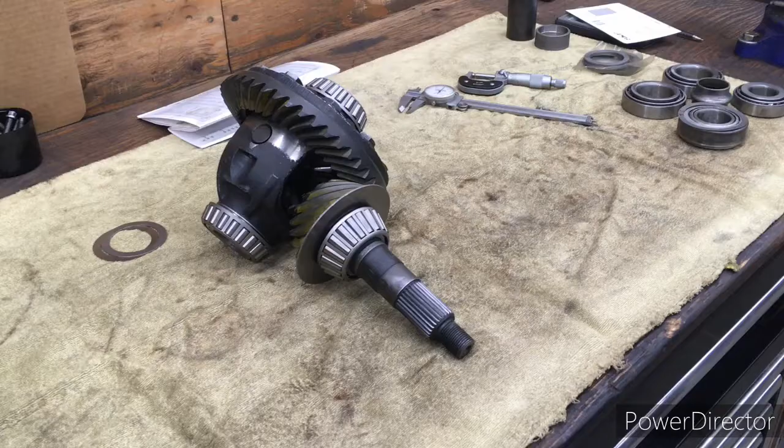Front Dana 30 on the Jeep Grand Cherokee. And I guess the first thing is you want to disassemble the old assembly. Try and save your bearings if you can, but remove your bearings and keep track of your shims. There should be some shims in behind each bearing on the carrier. So remove the bearings, keep track of the shims,

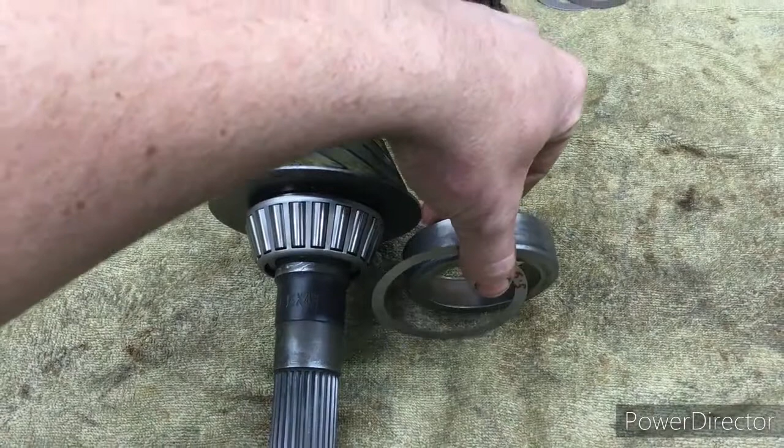remove the bearings on the pinion and keep track of the shims there. You might have to remove the race inside the housing there. There may be some shims beside the cup that's installed in the housing. Keep track of all of that, and then once you've removed your bearings and kept track of your shims,

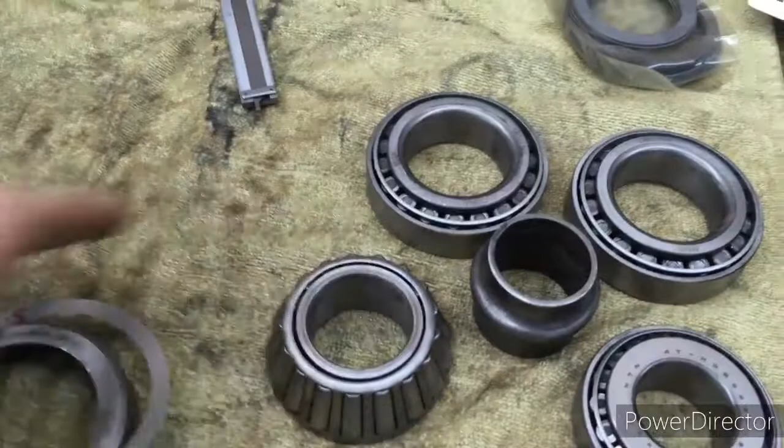get your old bearings, if you were able to save them. I wasn't able to save the carrier bearings, so I had to buy a new set and grind out the inside bore on all of the bearings so that you can slip them on and off by hand. Use a stone, not a carbide tip, just like sharpening a chisel. You grind down the hardened steel with a stone.

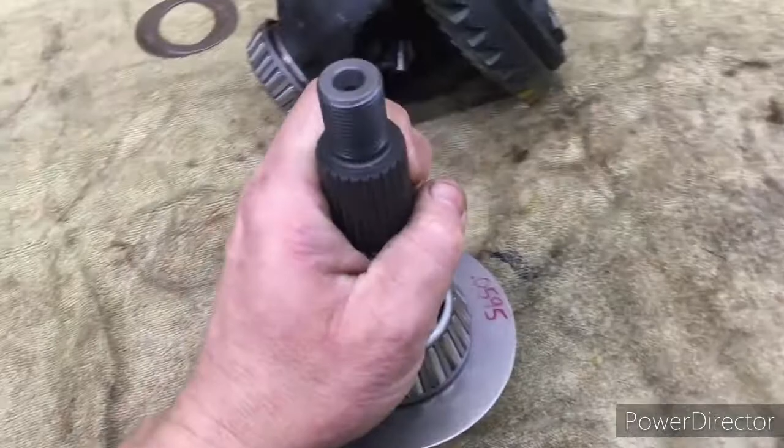Once you've got your bearings, they're all slip fit and ready. Then what I also did, because I'm changing the ring and the pinion, this is a brand new set. My new pinion, the yoke was tight, so that wouldn't go on there. Had to be press fit on.

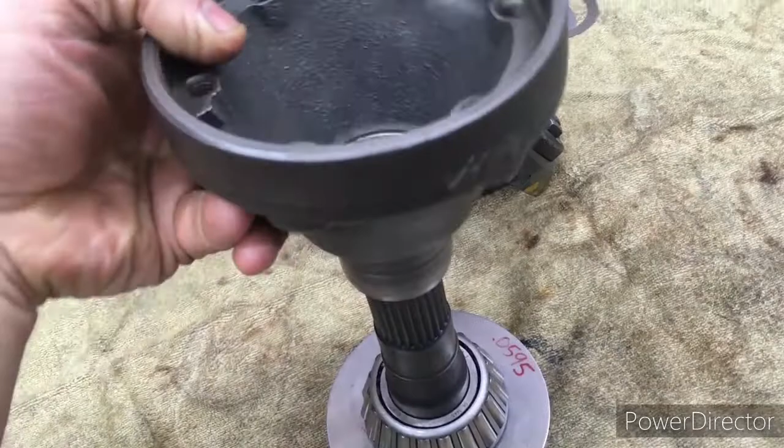So what I did was I put some lapping compound on here, and I worked it up and down in the press. I'd press it on, press it off, and I just kept doing that until I got it to the point where I can install it and remove it by hand. That's my preference. You don't have to do that if you don't want to. I like all my parts to go on and off by hand, just for ease of installation and disassembly.

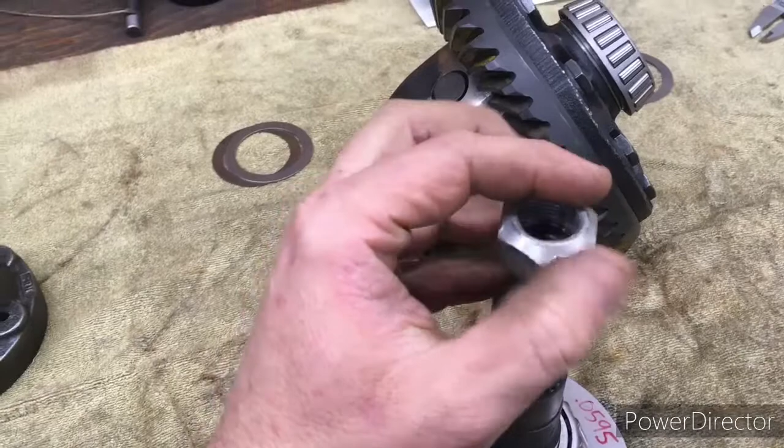Also, the old nut, if you have a die or a tap, you can tap the threads in here and make sure that it'll go on and off by hand as well. I don't have the tap for that size, so again I used lapping compound, and I spun this up and down with the impact, so that'll come on and off by hand. All of this is in preparation for the assembly and disassembly of the pinion when you're trying to determine what you need for your shims, because you'll be adjusting those for your contact pattern.

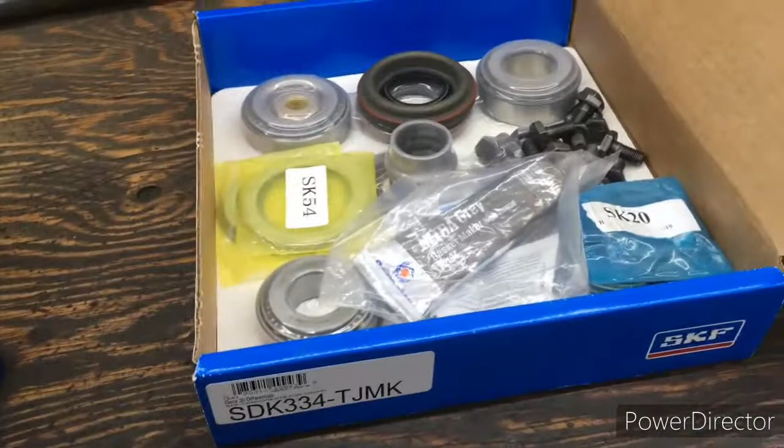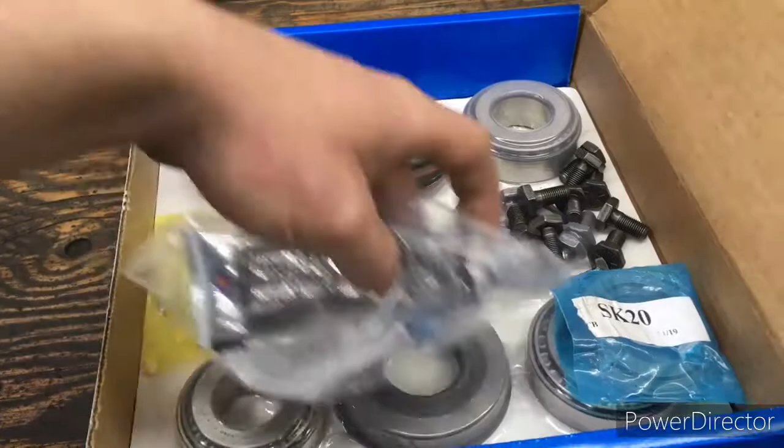So next, get yourself a good installation kit. This is the one that I've got, and it'll have everything you need in there. It'll have your bolts, your bearings, your seals, your crush sleeve, your shims, your sealant, your compound. And I also have this reference book here. I got this with the ring and pinion. I did not get that with the rebuild kit.

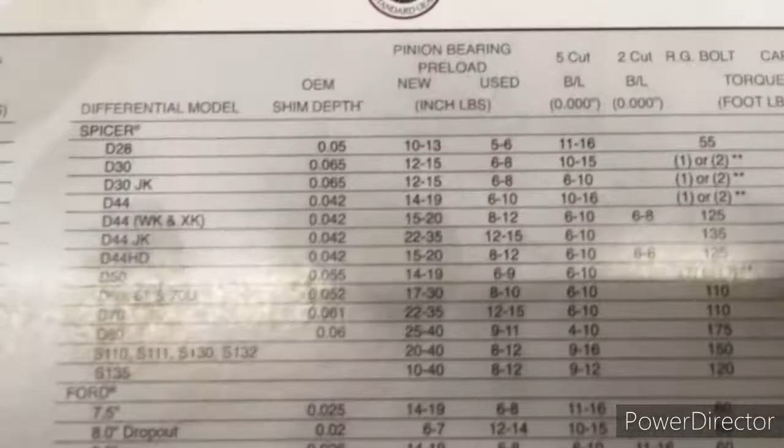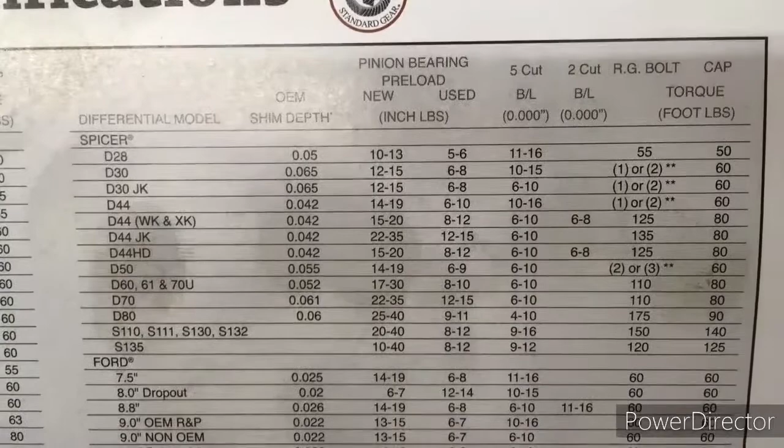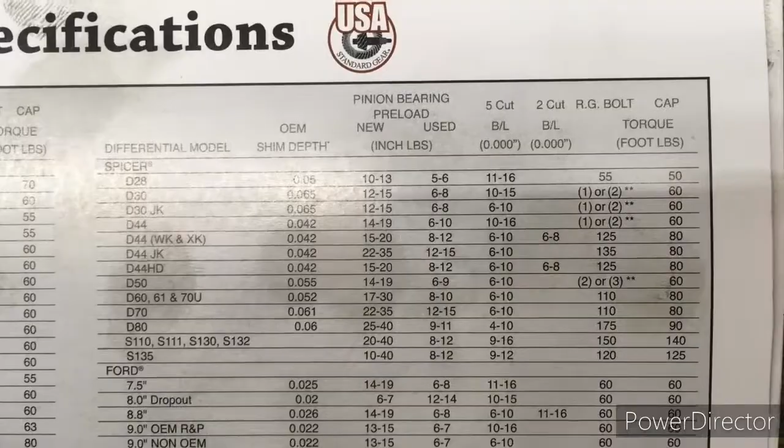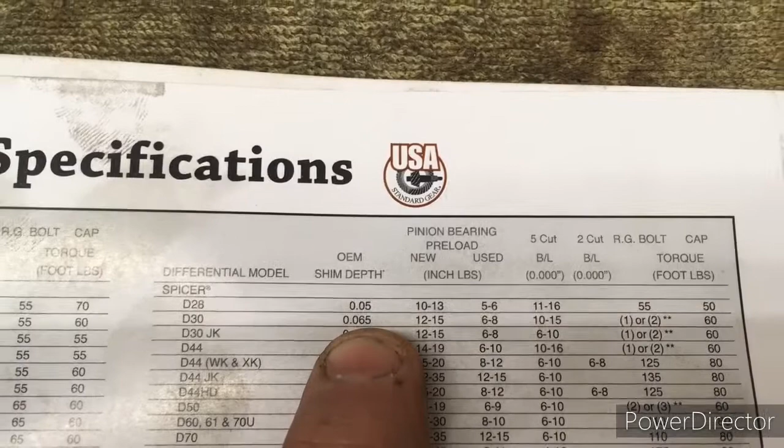So if you don't have this information for your application, maybe go online and see if you can get it. It'll give you your OEM shim depth, your preload for your bearings, your backlash, and some torque specifications. In our case, we're doing the Dana 30, so we've got 65 thou shim depth OEM. We've got our new bearings at 12 to 15 inch-pounds preload. We've got our backlash at 10 to 15.

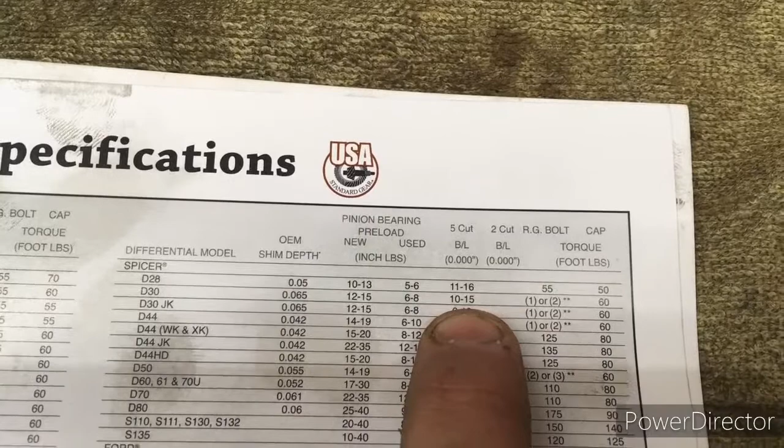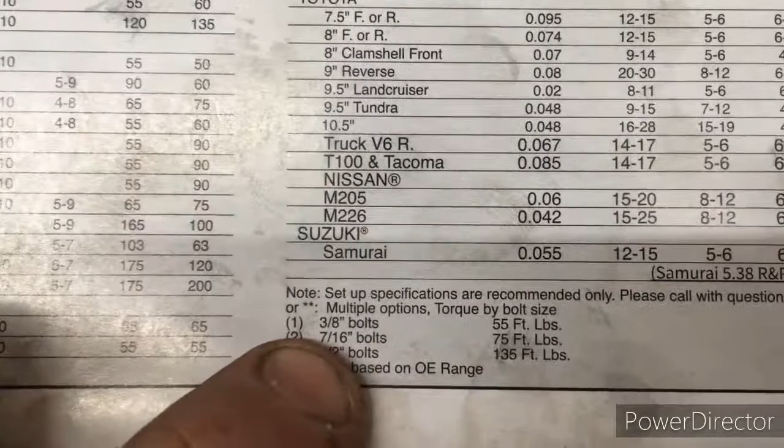And then here are the different size bolts. We'll go down to the bottom. If they're 3/8, they're 55 foot-pounds. If they're 7/16, they're 75 foot-pounds. Those are for the ring bolt and the cap. Those are your torque specifications there.

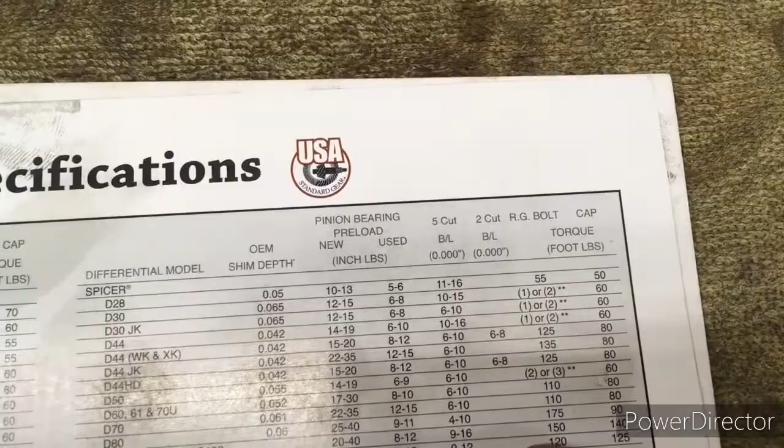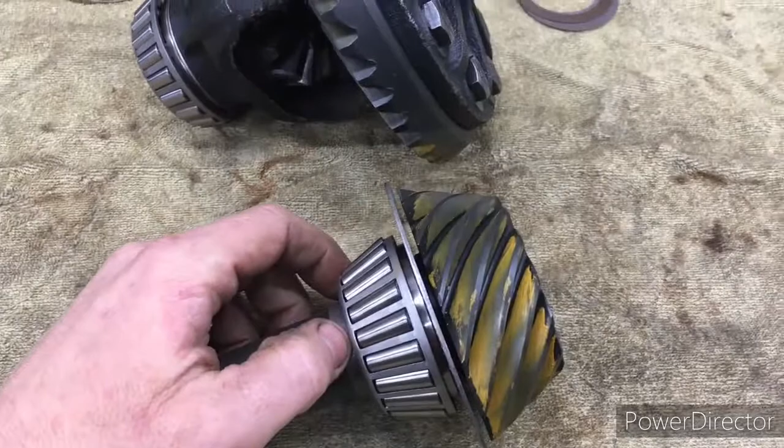So now that we've got everything ready for the assembly, I would start off with the original shims. Put the original shims back on with our dummy bearings. So reassemble shims and dummy bearings on the carrier, and reassemble your original shim pack for the pinion if you had them. In my case, all they had was this thick oil slinger, and this is acting as the shim. I didn't bother with the number on the end of the pinion. That just caused me a bunch of grief.

I suggest you put it all back together with the original shims, and then you put your compound on there, you get a pattern on your teeth, and you start from there, and then you do your adjustments. That number on the end of the pinion just caused me a bunch of grief.

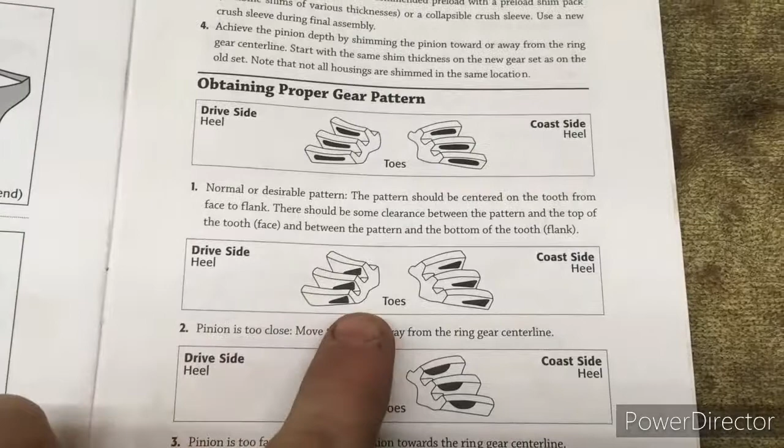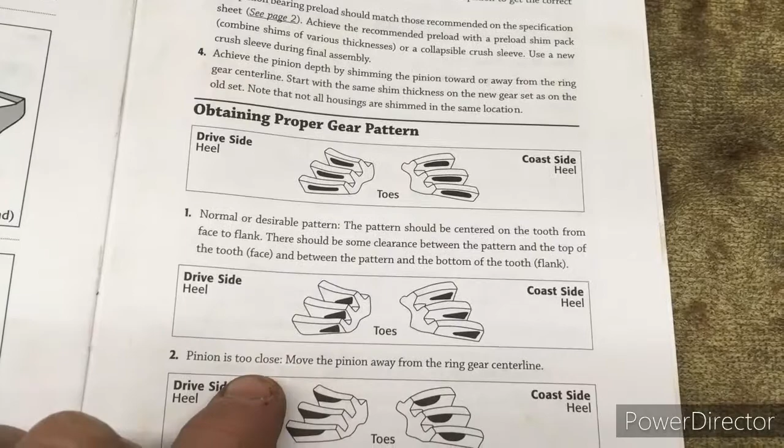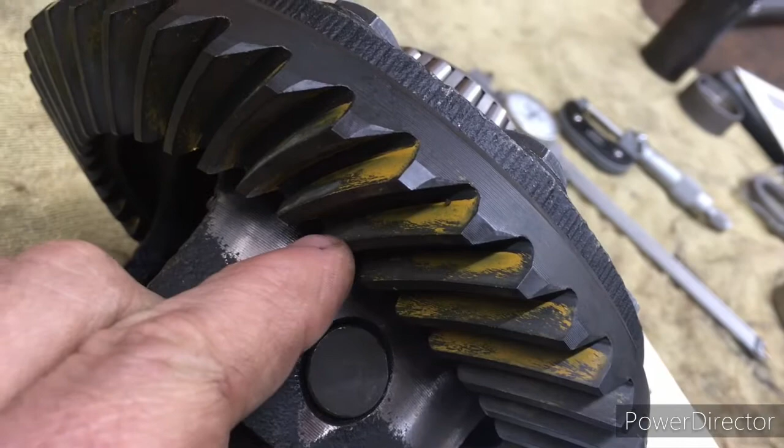The back of this book here also helps us out with a guide, and it's telling us that if the contact pattern is in the bottom corner there of the drive tooth, then our pinion is too close, and if it's at the top, then the pinion is too far away. This is the drive side of the gear, so it's kind of curved outwards here, and so you check that, and that tells you whether or not you have to shim this thing in or out and make your adjustments.

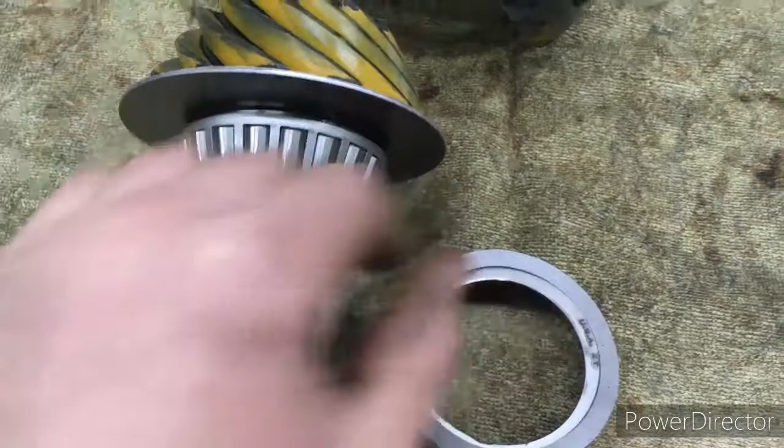Your shims, in my case, was just this plate here. So you may have shims that go in underneath this bearing, in between the bearing and the pinion head, or you'll have shims that go in behind the cup. So one or the other, or both, possibly. In this particular example, that got me very close, and rather than putting a shim along with this oil slinger ring, I put the remaining shim in behind the cup here, which was 5.5, and that got me to where I like the contact pattern.

So you are removing this, you're getting your contact pattern, you're figuring out what you need to do for shims, and then you've got to remove this, adjust your shims and then reassemble it. So that is why we have the dummy bearings, because we're going to be adjusting our shims, so we want to slip those bearings off by hand and reassemble everything and put it in. That is also why I like to have this coming off by hand.

And another thing is, I personally don't put the crush sleeve back in when I'm doing this assembly and disassembly all the time. I'll put the bearing back in here, and then I use my yoke and the nut, and I just snug it down all by hand, and you'll be able to tell, right? If you overdo it, it'll turn a little tight. But you just need to tighten it up by hand, because you're taking it apart, putting it back together. You just don't want any wiggling here. You want to make sure this is just sturdy and turns freely while you're making those adjustments.

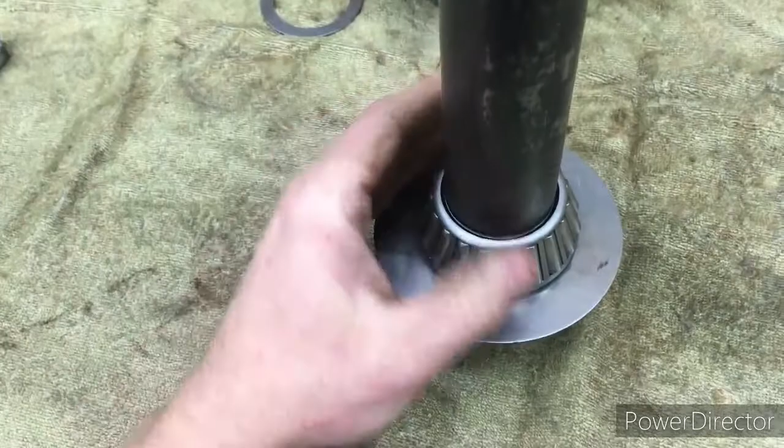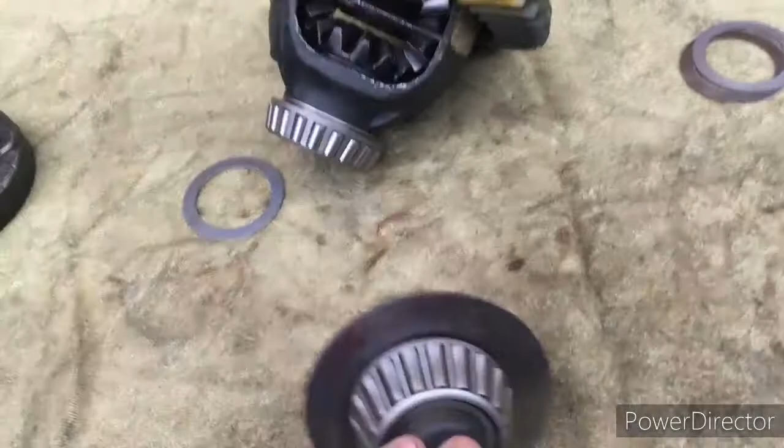And so new bearings, we want to put this in the press, and you're going to need to get yourself some jigs or whatever to make that happen. And so I just got a piece of pipe here, and it just contacts the inside race of the bearing. Seat that down, and then on the carrier here, sometimes what happens is the bearing is actually lower than the carrier.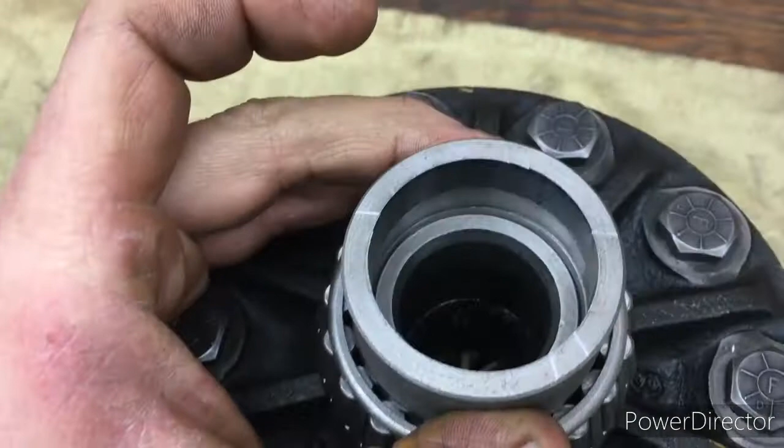So when you're adjusting those shims, it could actually end up becoming just a little bit lower than the face of the carrier here. So you might need to get yourself something that has like a step in it. And you put that on there, and that's going to contact the inside race of the bearing, but not the carrier, and seat that down all the way. Seat both of your carrier bearings down with your shims.

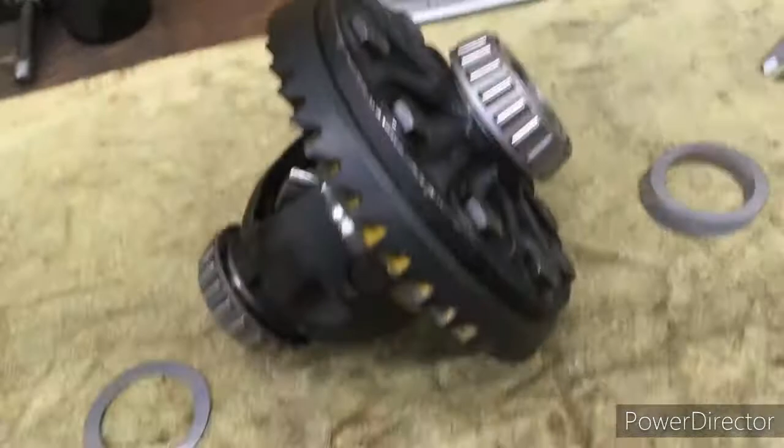And now once we've got to where we're at right now here, then we want to be able to install our pinion. So we're going to have our pinion. We've already got our shim and our cup installed into the housing on the Jeep. Then we have our crush sleeve. You put the new one in there. We'll have our bearing. The bearing won't slide on here, so it'll be about there. It'll stay there because it's going to be tight.

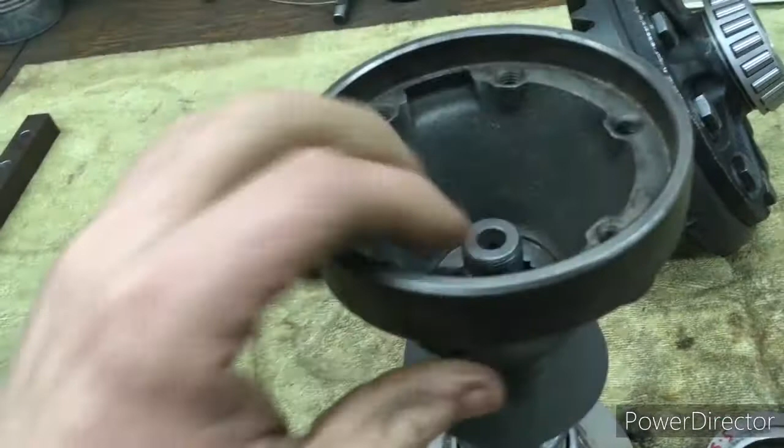And then if your kit has it, or if it was with the original assembly, there's this baffle, this oil slinger for this bearing on the end here. And then your yoke. I choose to put the yoke on, and you could at this moment install your oil seal if you like. I like to do that last, just in case this has to come apart again. That's another reason I would like to have this come on and off by hand, because once we do this final assembly, we'll take this off to install that oil seal.

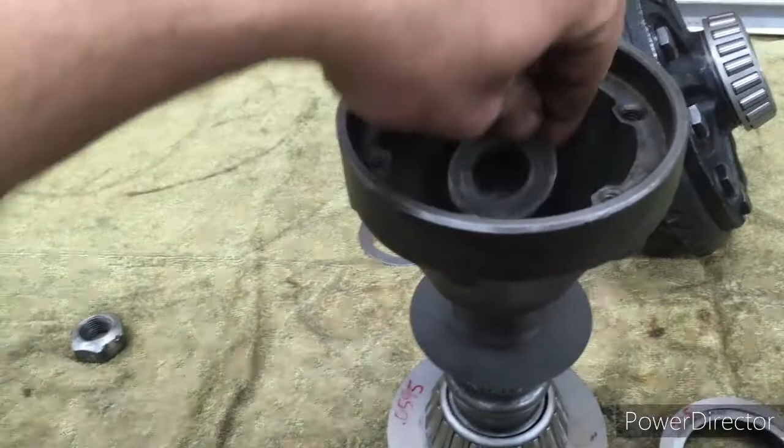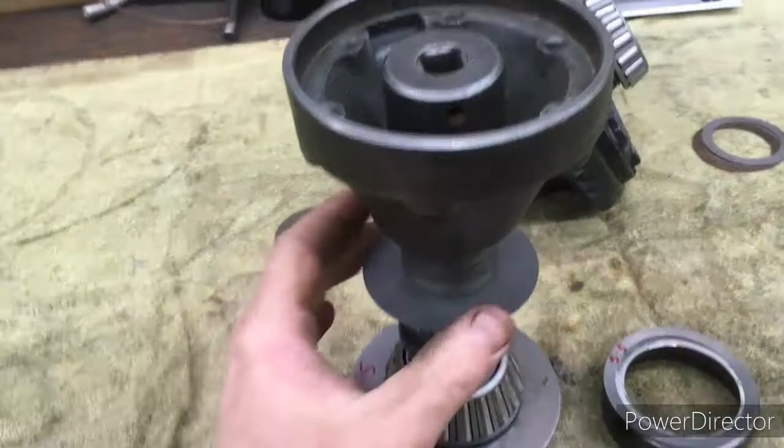So then we put on our washer here, our new lock nut, and now all of this is going to be tight. So if we didn't make this slip on by hand, this is an interference fit. Our lock nut is going to be tight because it's a lock nut, and our bearing is going to be tight driving onto the new pinion. And then we've got our new crush sleeve, which is going to be tight because you're going to be compressing it to get your preload between the two bearings.

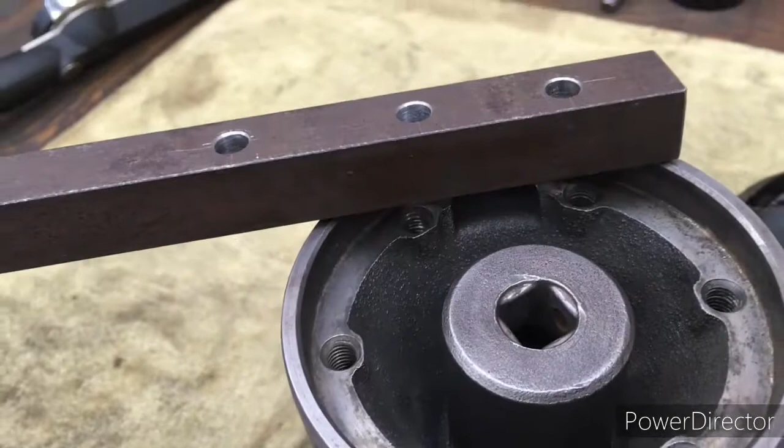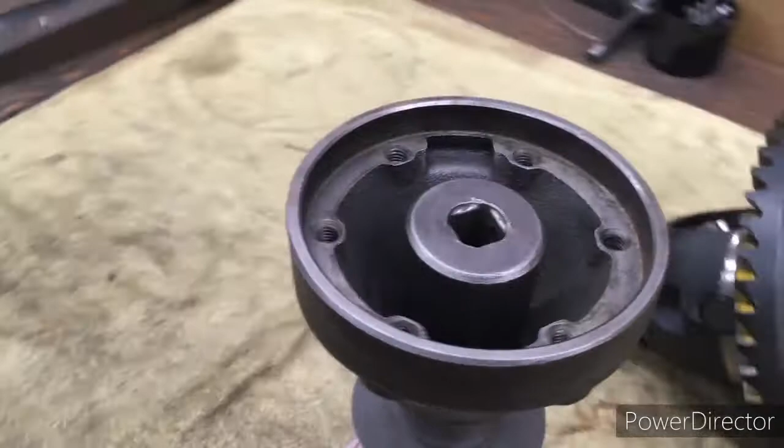So we need to hold our yoke while we're tightening down our nut, and there's no flats on this style of yoke, so I can't hold it with the pipe wrench. Also, the diameter is too large, and I can't grab it here because it's tapered. So what I've done is I just made this bar here, and I drilled some holes in it, so you can get those two holes to line up, and then you can still see that our socket is below, and we could probably get an extension in beside the bar there. So this bar is going to hold the yoke while we're tightening this down, and we're going to continue to tighten this down until we get our preload.

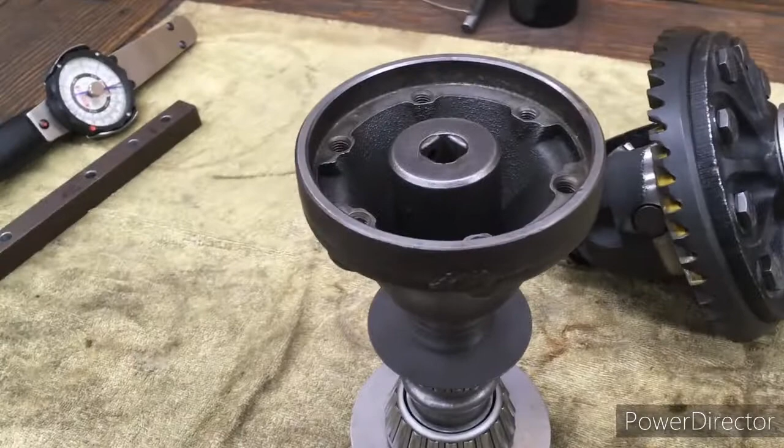And the preload is on the list here. The new pinion preload on here is 12 to 15 inch-pounds. So we have our inch-pound torque wrench. So you'll tighten it down, and then you'll put your inch-pound torque wrench on there, and you'll check it, and you'll just keep doing that and adjusting it until you get it within the spec there. Now I'll leave this until the absolute end, and then I will remove this, and then I'll put on my oil seal. But now we've got the pinion installed.

Now we go back to the carrier. We're going to install our carrier. This should go in tight because our shims there cause the preload on these two bearings, which could in theory be a 5 thou interference fit. So we're going to pound this in with a rubber hammer, and then we're going to put on our bearing caps. We're going to tighten that down. The spec on the sheet for the bearing cap bolts was 50 foot-pounds, and so we're tightening this down.

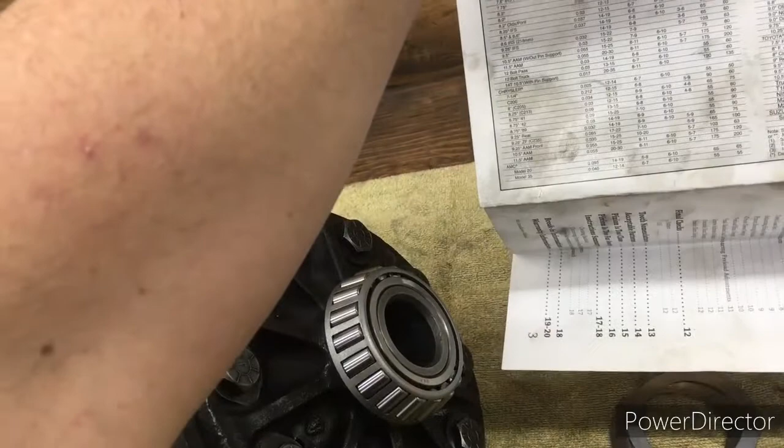And now I've got to go back. I want to check my backlash is still good, and I want to check my contact and make sure my contact on the teeth is still good. Now that I'm happy with all of that, that's when I remove the yoke, and then I'll put in that oil seal.